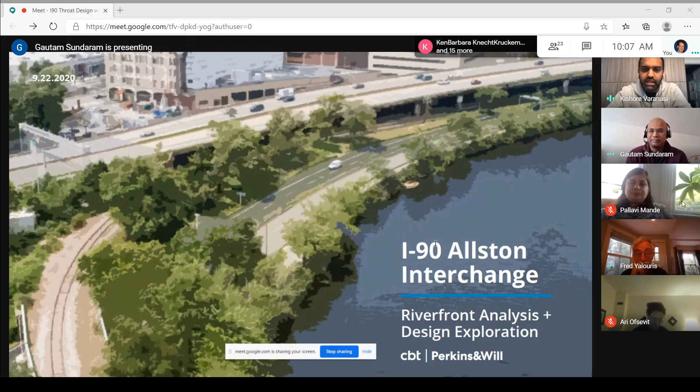I know that some of you have asked me to share this, and this has been cooking to the last minute, so if I haven't been able to share in advance, we can definitely share this presentation right after. A lot of the work has to do with the River's Edge related items, and we worked with Gautam on this, but I'll let him walk through the presentation and I'll chime in as we go along.

Thanks, Kishore. A lot of the work you see is really integrated with the work that Kishore, Devanshi, and the team have been leading. What we tried to do is really summarize all of this to make it a good synopsis of the overall work we've been doing for the last month or a little over that.

From a methodology standpoint, our process was: when we think about the River's Edge, we think about all of the transportation corridors currently being designed and all of the spatial parameters—we're looking at feet and inches for lane widths and shoulders. We felt that if we only focus on those transportation corridors, we won't be able to address or think about what it means from a riverfront standpoint.

To really address this from a riverfront standpoint, not just restoring it to what it is right now, we want this to be something progressive, but also thought of as part of these entire infrastructure systems themselves.

To evolve that thinking, we took a diligent process of first analyzing and understanding what existing natural systems are there, really looking at the infrastructure systems we have with all the outfalls and stormwater infrastructure, understanding what those challenges and conditions are, and then also looking forward to the impacts of climate change, especially flooding conditions and extreme heat, and understanding those impacts on the riverfront edge.

We looked not just at the throat as one section, but thought about the riverfront as a diverse condition all the way from River Street to the BU Bridge. Along with a series of precedents and examples around us, and what we learned from the analysis, we developed a toolkit of strategies.

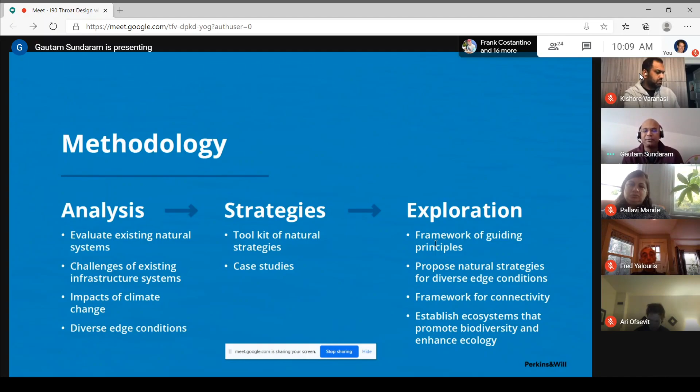We took those strategies and employed them back to think about this as a framework grounded by a series of guiding principles, setting this up with natural strategies, employing a lot of urban design and connectivity, and establishing this as new ecosystems that promote the ecological benefits we'd like to see, setting a strong attitude for what the riverfront vision should be.

Starting from analysis—and Kishore, feel free to chime in—we looked at the existing conditions: where we have the bridges, what we have from the existing right-of-way for the roadways, the existing location for pedestrian walkways currently shared by cyclists and pedestrians altogether, and a lot of those constrained conditions as well.

The PDW path—Gautam, go back. Sorry, the one thing we've been looking at, above and beyond just the throat and the rest of the system, is the BU Bridge Grand Junction nexus, and how we might link the Paul Dudley White path to the urban system that exists at multiple complicated levels.

You'll see some ideas. One is clearly the Paul Dudley White path as it passes underneath the BU Bridge—very constrained, very unsafe, with both pedestrians and bikes going around the abutment. There's right-of-way underneath, in the left image next to Soldiers Field Road, that requires some rearrangement of the Grand Junction Bridge to cut through, which is probably not shown here.

Can we just go straight essentially instead of doing that dog-leg movement underneath the bridge, while still preserving that for pedestrians? Can the bikes go straight through? And also, can we connect from BU Bridge, as you're coming from Cambridge and Grand Junction, in a meaningful way down to the river, including some unidentified paths? These are some of the places where we paid attention.

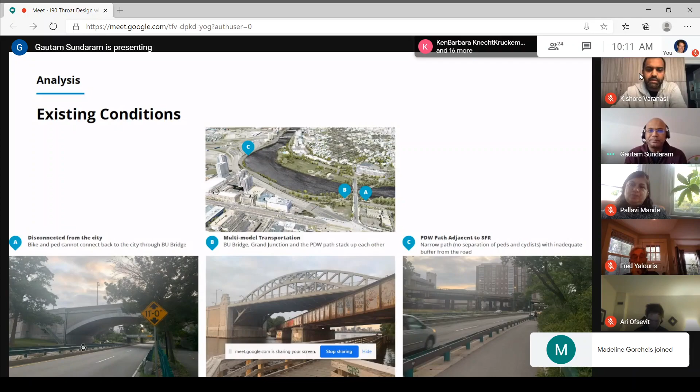So then starting to analyze, this is looking at a map. This is River Street over here, this is BU Bridge, as Kishore was just describing. What this lays out is the on-grade condition, which shows the realigned Soldiers Field Road, the realigned Interstate 90, and the Grand Junction and the train tracks associated with that.

What we've done is basically analyzed this condition against all of those criteria we were talking about earlier. For us, that began with understanding what the riverbed condition itself is. So this reflects the contours or topography at the riverbed condition that starts to highlight where do we have the steep slopes.

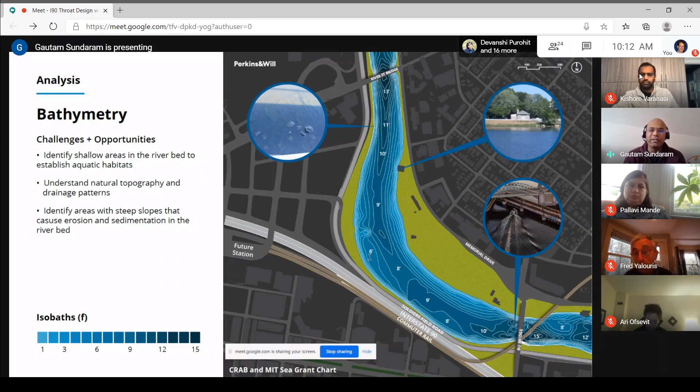Where do we have the shallow sections where we can start to create opportunities for introducing aquatic habitats, but also to look at the edge condition along with the land side, to think about where the erosion issues are, which is a very prevalent issue along the entire Charles River edge condition, where sediments and pollutants are being directly discharged into the river edge itself. So to look at opportunities where we can start to really make those a shallow section.

This graphic starts to now marry the riverbed topography with the landside topography. The reds are basically where it's highest, going down through to the greens. This helps us understand where we have those flat areas where we can start to make interventions of stormwater BMPs and other interventions that could help us deal with a lot of the stormwater issues, but also other ecological aspects.

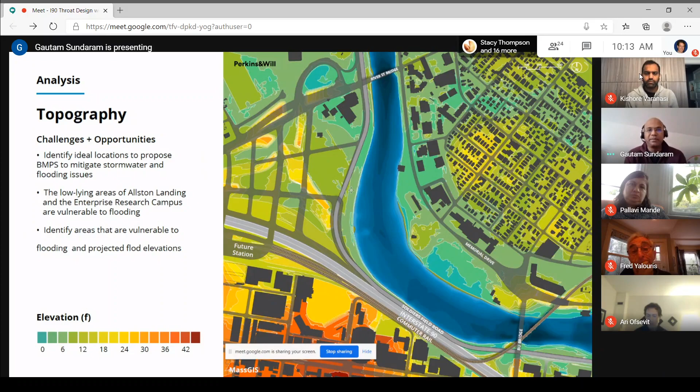Then looking at the infrastructure itself, this is something talked about a lot, especially with the Salt Creek infrastructure line, which basically drains a significant amount of watershed. MassDOT, I believe, has said that they're not touching that. What we wanted to do is highlight all of the existing infrastructure that is culminating to 3 CSOs that are directly outflowing into the riverbed, into the river corridor.

This is basically all the pollutants, the trash that is currently being discharged directly. You can see it graphically through these plumes. That's really bringing a lot of pollutants that have caused aquatic die-off. So that's one. The second is all of the road.

Yes, go ahead, Pallavi. Can I just quickly clarify? I know it was just mentioned in terms of CSOs, but those are not CSOs. The CSOs are just on the other side of the river, marked in green, because a lot of people have emailed me to confirm that. Those are systems that are just taking stormwater from a larger drainage area. Okay, so this is basically just the drainage, but these are still direct outfalls. Yes, you can see those. These are the images of what they are. There is no pre-treatment, no way of collecting it or pre-treating it before being discharged directly into the river. Absolutely, thank you, thanks for clarifying that.

In addition to that, we've located all of those drain connections that basically discharge all of the stormwater from the roadways directly into the river as well, which brings the salts, the oils, the sand, and other pollutants discharging into the river edge. This really starts to highlight we've got some serious infrastructure issues, and it would be a missed opportunity not to address this as part of reimagining the riverfront edge.

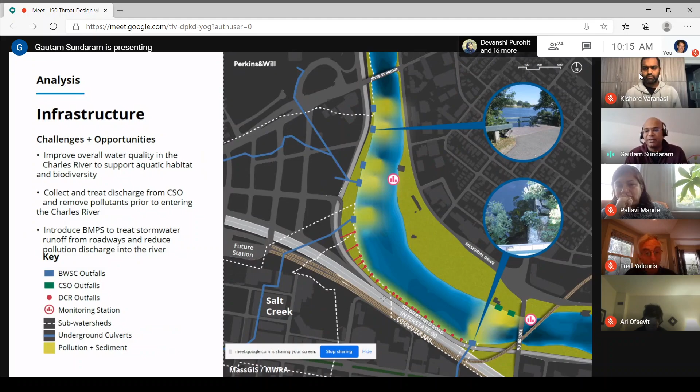And then along with that, to really look at the flooding conditions as well. While this is looking at elevations, what we tried to do is look at what the projected elevations would be for 2070 for a 100-year storm or a 1% storm, and to look at where those flooding conditions are. You can see that highlighted here. We've also started to map out where some landside drainage flooding conditions are, which would lead us to think about landside strategies. Pallavi, you've been trying to think about a very integrated approach which looks at strategies of managing water and collecting water before it's discharged towards the riverfront.

So I think coupled with both of these strategies, not only along the riverfront edge, but also on the land side, would definitely be immensely helpful. Looking at this from a resiliency standpoint, we need to think about how we incorporate areas for storage and also improve the flooding conditions of our infrastructure.

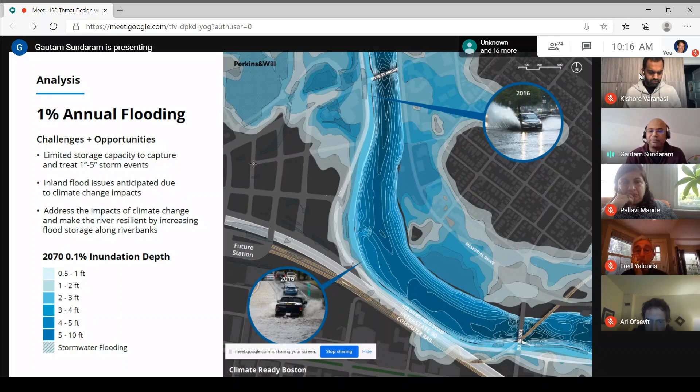Then looking at the ecology and habitat as well - currently the conditions along that edge are fairly harsh. There's a lot of pavement. There are trees, but significant portions of them are dead, or they're not providing adequate shade on the pedestrian walkways, which are constrained along them. The edge condition itself is very steep, and the plant materials have a lot of invasive species.

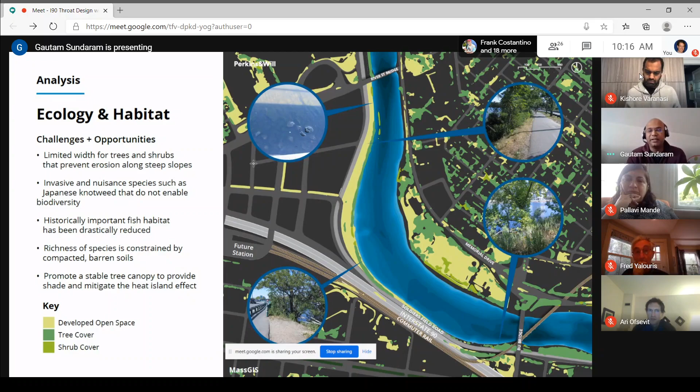Typically, what you'd want to see are plant materials that have a lot more biodiversity, but also help stabilize the slope as well. In order to do that, you have to have a really strategic way of thinking about the entire ecology and the edge condition, and also looking at how it helps the aquatic habitat side too.

And this directly relates to extreme heat. This is a map that looks at surface temperatures, and the reds are always the highest, close to 95 degrees. What we're trying to highlight is that when you don't have a buffer against the riverfront edge and it's all pavement up to it, the river's edge condition gets very hot.

And that relates to aquatic die-off. It also relates to how algae blooms are occurring, and I know there's been a lot of recent conversation about algae blooms along the Charles River. In contrast, when you look across on the Cambridge side, the difference is nearly 10 degrees when you have green space at the riverfront edge itself.

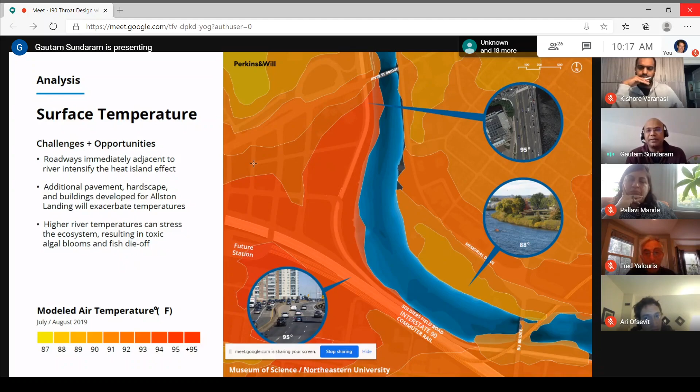So really thinking about how we create green space and create buffer will help us mitigate extreme heat and the effects of urban heat island.

And then finally, at the surface, looking at the edge condition dimensionally to see what constraints we have. The width from the edge of the curb ranges from 9 feet. Where we get to the green side, it gets to the highest, nearly 150 feet wide, but then it starts to get constrained back. And then we have nearly a 450 foot edge condition where we pretty much have no width.

So how do we incorporate the Paul Dudley White path? How do we incorporate a number of these ecological and landscape strategies along this entire edge to give us those greater benefits? This really helped us understand what those edge conditions are, not only spatially, but also physically - looking at where there is stone, or steep slopes, or things like that.

Excuse me, just one question - are these dimensions measured from the edge of the river to the proposed edge of that future grade condition?

Yes, that is correct. All of the analysis you see is based on the on-grade condition, every single one of them.

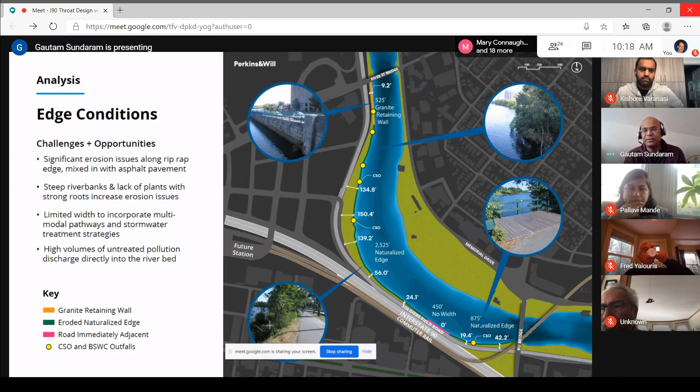And then looking at those edge conditions spatially as well - I'll go through this a little faster in the spirit of time. Rather than just focusing on the throat, we started from River Street. This is section A, highlighting the constraints along all of those edge conditions and where we have opportunities for incorporating bolder strategies.

With section A, where we're basically coming right off the Soldiers Field ramp, we only have about 9 feet of width left after the edge of the curb to the existing stone wall there. So how do we incorporate a multimodal path, and how do we even incorporate some kind of green buffer along there?

As we get closer towards sections B, C, and D, we start to see that we have a lot more dimension that allows us to create much more robust interventions - from wetlands and stormwater strategies, but also looking at opportunities for how we can pull back those outfall structures that are currently daylighting directly into the river. Can we cut them back like some of the other examples? We'll share those as well.

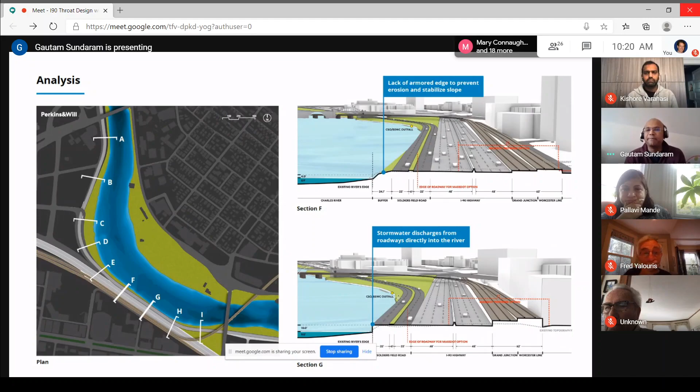As we get closer to what's been called the throat, you can see over here in section G we have a stretch of nearly 450 feet, plus or minus, where we have no available width between the edge of Soldiers Field Road and the existing shoreline. So we have some suggestions on how we can incorporate those.

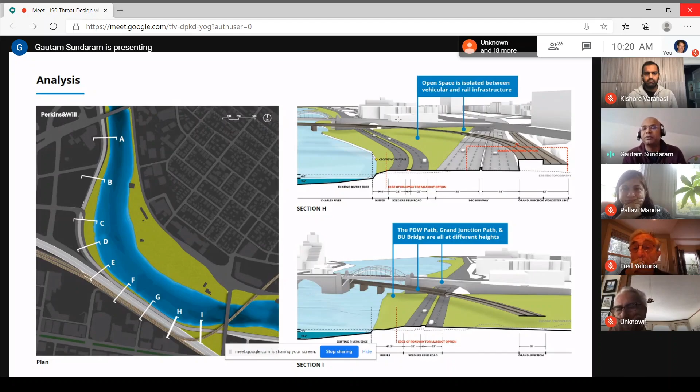As we get closer to the BU Bridge, the complexity increases, as Kishore was talking about, with the new rail connection with Soldiers Field Road, and how we use a landscape system or strategy that helps mitigate pedestrian connectivity all the way up to the BU Bridge, which currently doesn't exist.

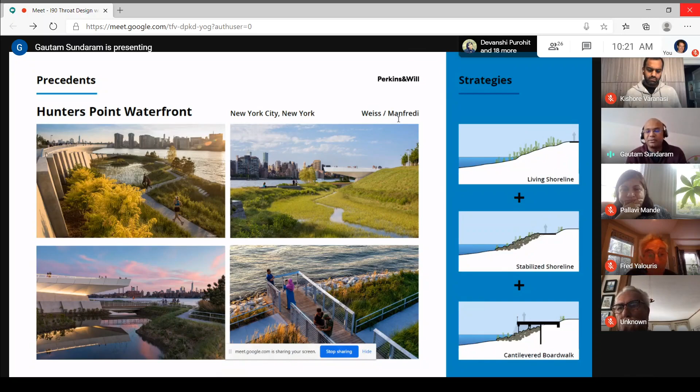So with that, we looked at some case studies of successful examples. This is Hunters Point Waterfront, where it was not only reimagined as infrastructure, but also as part of a park with academic value and also appreciation from a recreation standpoint, showing how these infrastructure systems can become a place of celebration. They dealt with a lot of similar issues, being right next to prominent vehicular corridors as well.

Very much within Boston, the Charlesgate by the Muddy River, where they're capping an existing outfall structure into pre-treatment wetlands. But that is also being celebrated as part of a passive and recreation system with dog parks, open space, and other environmental values and benefits.

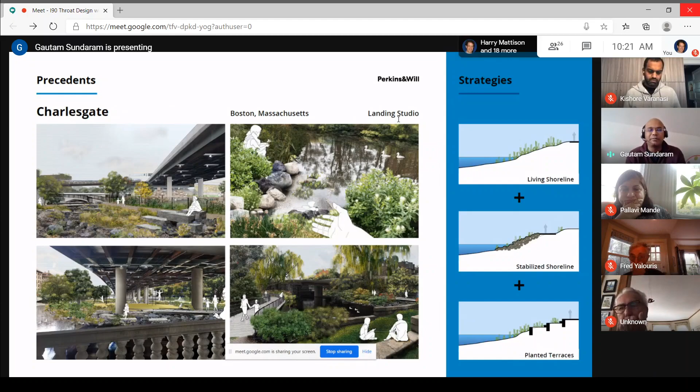Within those projects, there are also great strategies for how water from the roadways is collected into quality structures before being daylit into the natural river condition or the edge condition itself.

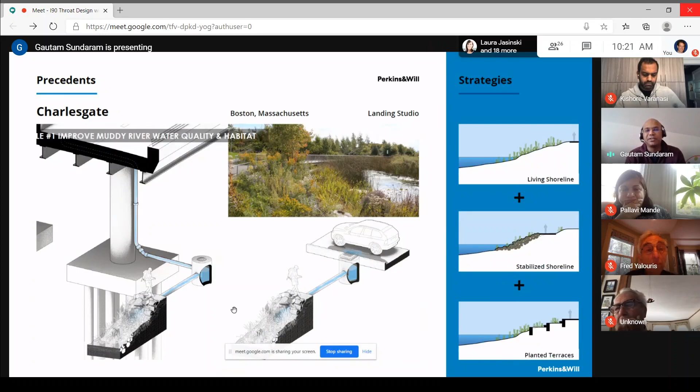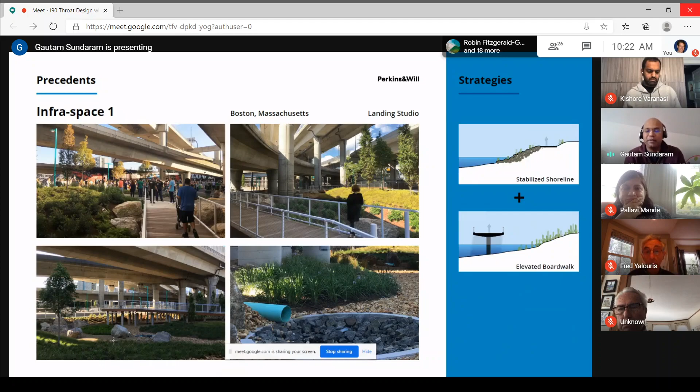Thinking about infrastructure as well, how can we collect a lot of the stormwater runoff and create pre-treatment? This is right here in Boston by Ink Block. It's very successful infrastructure, done in a contemporary way, but also becomes very programmable and park-like, adding more value as a park system too.

And just some other examples about how living shorelines have been accomplished, and how multimodal circulation systems have been incorporated as part of that.

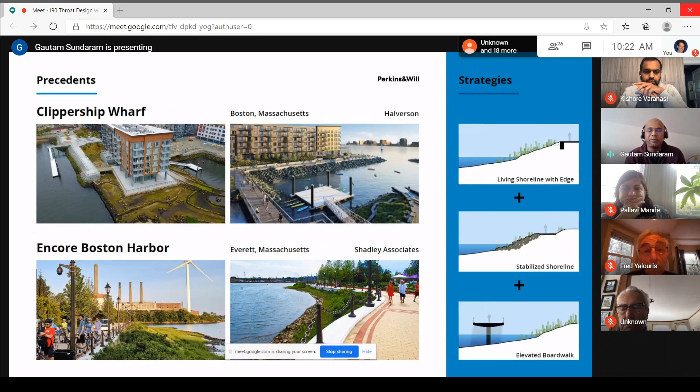So really drawing upon all of these precedents and what we learned from the analysis, we established a toolkit of two categories of strategies. One is basically naturalized edge conditions, about how we can make that a living shoreline.

How do we incorporate a lot of the circulation systems as part of it? And how do we also start to create opportunities for aquatic habitat benches and other ways to really bring back that river life and softness along that entire edge.

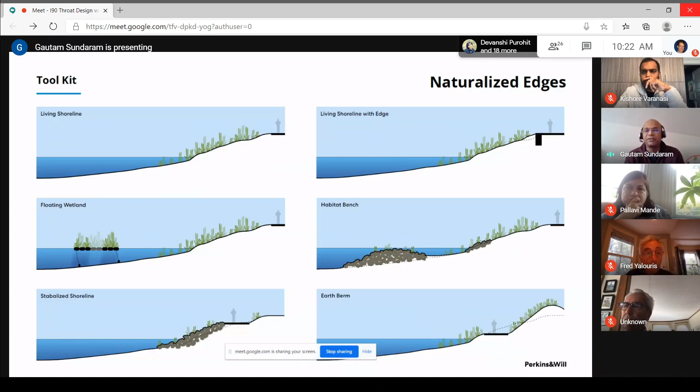Similarly, when we're up against infrastructure or built environments, how do we continue to have those kinds of benefits in how we think about edge conditions? Whether coming up right against a riverfront, how do we armor the slope or create opportunities for stepping down that allow engagement with the riverfront, or have boardwalks in minimal locations that don't impede so much on the shadows and the aquatic life, but still help create some of the circulation paths.

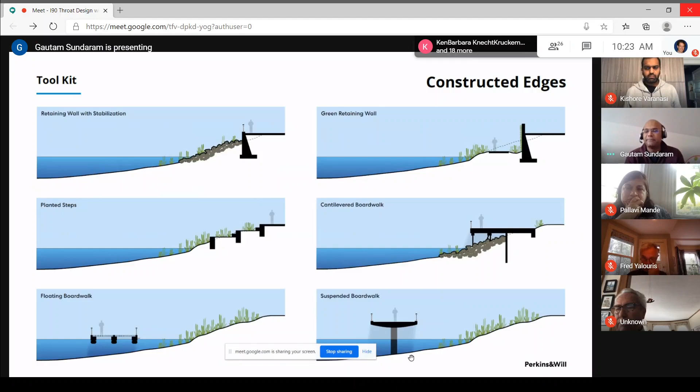So we said, okay, let's take these strategies and look back at those sections and ask how we address each of the conditions we were looking at. So starting with section A.

Looking at that 9-foot dimension we currently have, can we incorporate a well-planted verge that helps create that buffer, but also has enough dimension to help it survive?

Also for longevity, we reviewed a lot of these strategies with Pallavi and team, and we also had folks from the BSA and BSLA giving us input on this, along with Weston and Sampson. So we incorporated a lot of their suggestions on what we felt were appropriate strategies and to get the accurate dimensions as well.

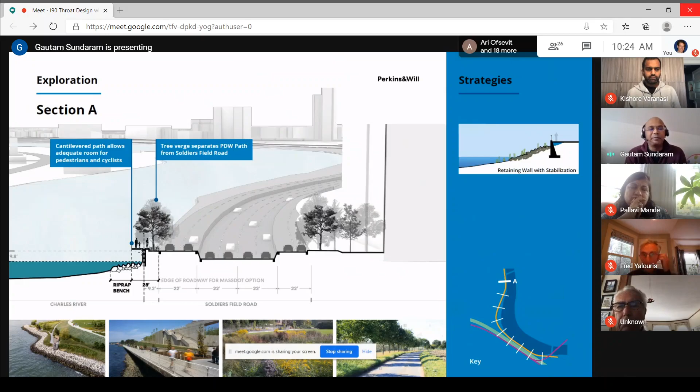And then looking at a multimodal shared path of bike lane and pedestrian walkway nearly 28 feet wide, it'll have to be cantilevered above and past the wall itself to incorporate that.

And then as we get closer, where we have a little more dimension with the green spaces, we can incorporate areas for pre-treatment and wetlands, where those not only serve as stormwater infrastructure, but also become spaces you can actually engage with and walk through as part of this larger park.

This is the existing shoreline, just for reference. What we're suggesting is to take what's currently a very steep slope and make it a much more gradual slope, establishing a softer, living shoreline along that entire edge condition.

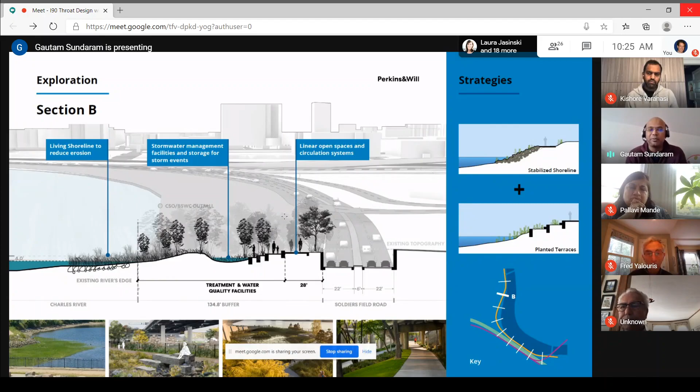You start to see this as a combination of open spaces, wide walkways and promenades that separate bike lanes and pedestrian walkways. In some locations where outfall structures were previously located right at the edge, can we cut them and cap them, and really daylight that water into wetlands where we can collect the water, treat it, clean out the trash, and create storage opportunities before it's led into the river corridor.

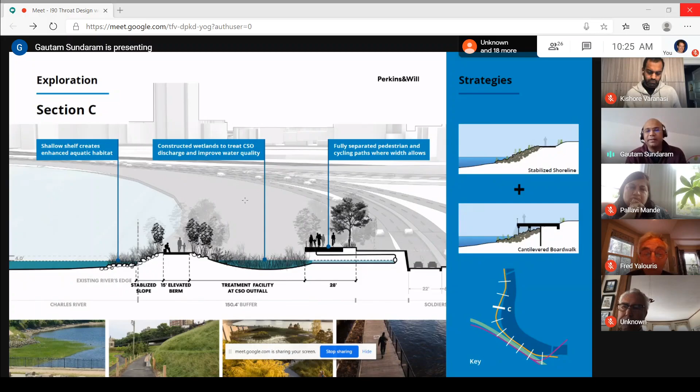These also become opportunities for creating overlooks where you can appreciate views not only across the river, but also during events.

As we get closer to opportunities for connectivity across, for example, the Agganis Way, we think not just about accessibility, but about introducing berms as a natural barrier between the roadways, also on the Cambridge side. These could be ADA accessible at a slope under 5% as they ramp up to locations where we can connect across to Agganis Way.

These also become places where you can separate the bikes and pedestrians, creating very unique and diverse conditions that make this a bucolic and active landscape.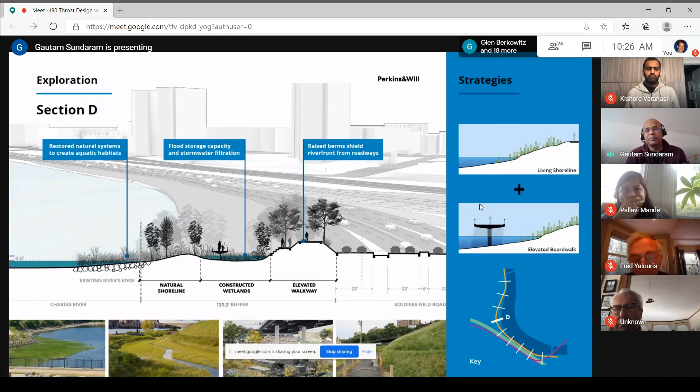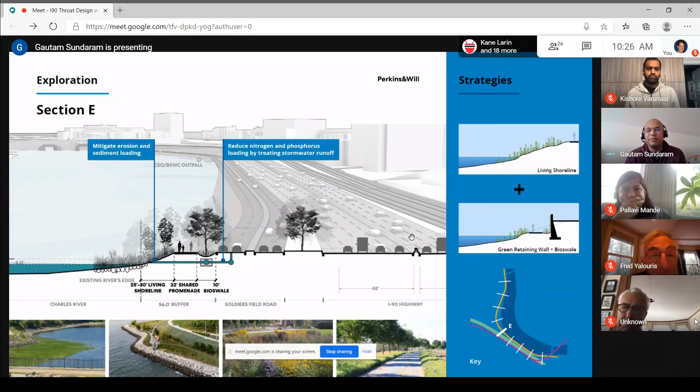As we get closer to the throat condition, we think about how to collect all of the stormwater runoff, now with the Pike and Soldiers Field Road on the same elevation. Is there a strategy for collecting all the water and passing it through some treatment process?

Water quality structures here, and once the sediments and pollutants are taken out of it, that's when it gets discharged along the edge, like some of the examples shown earlier.

These kinds of piers and boardwalks can be built without really affecting the aquatic habitat below.

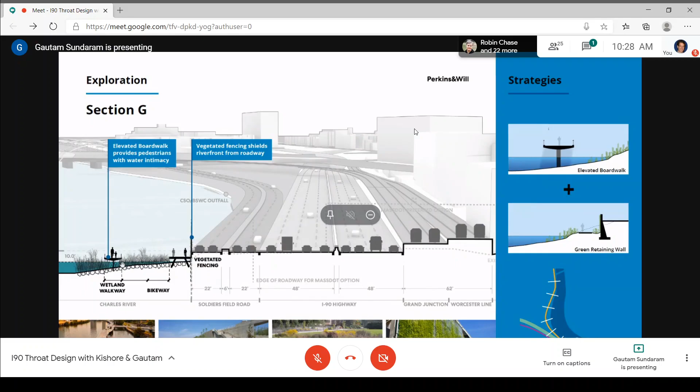When we have the most constrained condition, we look at opportunities where the bike lane sits right against Soldiers Field Road with some kind of visual and noise screen. Then pedestrians have a boardwalk that's much more part of the river corridor, and in some places it comes back closer next to the bike lane, like this example, to create diverse conditions.

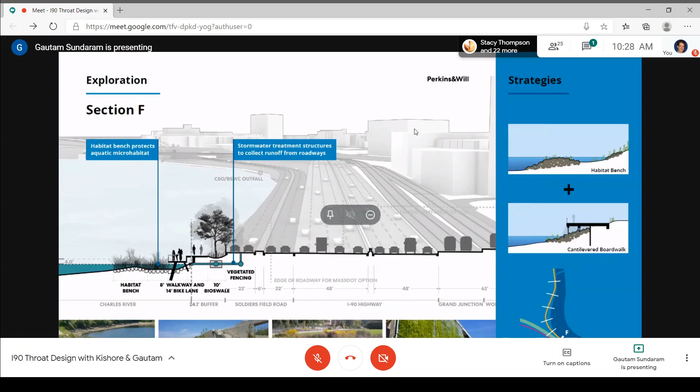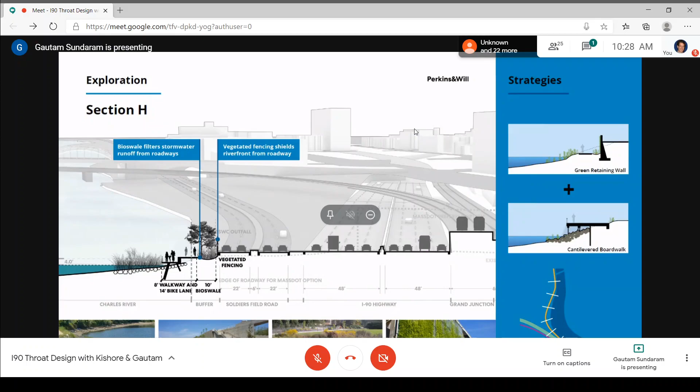As we get closer back to the BU Bridge, the bike and pedestrian paths come back together. We can incorporate a bioswale here again to collect a lot of the water. And as we approach the BU Bridge, we think about incorporating natural berms that, at an ADA accessible path, let us connect up to the BU Bridge. We have some visuals as well to show that.

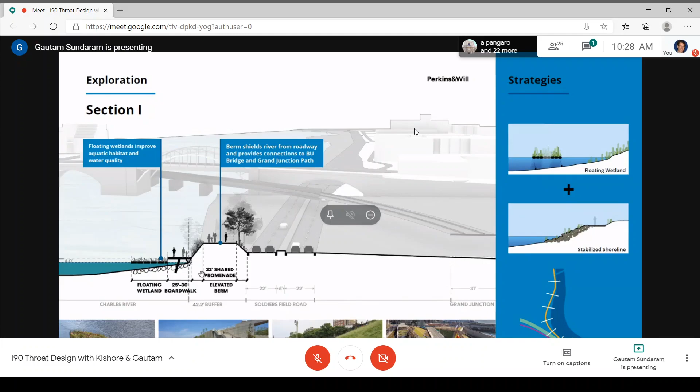So, looking at those as a series of landscape strategies—Kishore, maybe you want to speak about how we've approached this as an overall framework of connectivity as well.

Yeah, I think this is pretty well covered so far. Again, it's about connections—BU Bridge connections, and also potentially looking at the connection along the Allston neighborhood, behind the neighborhood between the tracks to Cambridge Street.

So we're looking at all of those connections and how they can be resolved through creative grading, and also turning them into elegant solutions, which you'll see in a moment.

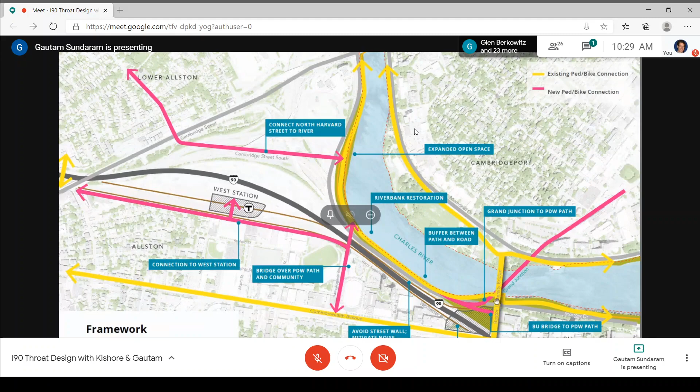So this is a view of the existing conditions right now. I don't think it needs any more description. But the idea was how do you visualize this framework of different types of strategies into what really sets up not only a new functioning, living landscape along the entire edge of the riverfront, but also starts to make those kinds of connectivity into the neighborhood.

So here you can see a potential connection to the Agganis Way, connection to the Allston neighborhood towards Cambridge Street, and this is also looking at the BU Bridge as well. We'll have enlargements of all of these to show the different examples.

The idea really was, if you have the main circulation spine of a promenade, bikeways and pedestrian ways along the edge, you also have opportunities to create wetlands and interventions with oxbows that allow water to come in. Not only do they provide recreation path systems, but also incorporate stormwater strategies, wetlands, and resiliency management as part of those strategies, completely softening that entire edge condition.

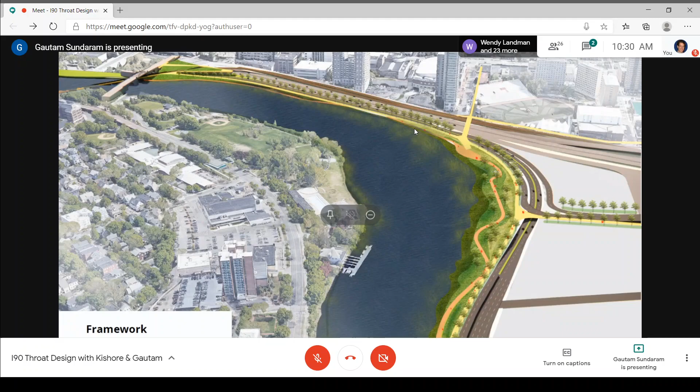So with that, we'll zoom into some of these enlargements, and Kishore, maybe we can walk this through together. Here the idea was if you had that wide promenade along Soldiers Field Road.

And if you had a boardwalk along the edge as well, that boardwalk could continue to meet with the existing path below the BU Bridge, but also we could have an ADA accessible path that really allows us to make those circulation systems.

You can follow my cursor all the way up to the BU Bridge, but also think about ways of incorporating new spaces where you could imagine this to be a great new overlook, a way of appreciating and looking down for events, or being part of how we engage with the river through a series of these moments.

And then with pedestrian connections on both sides of the Grand Junction. Yeah, I think it could work with either side. I know there may be options in terms of how the Grand Junction pedestrian trail may come out. If you're on the upstream it'll work differently versus the downstream, but both can be connected, and it'll work as part of the BU Bridge connection system as well.

You can go both towards the Paul Dudley White path, but also go up to the city at the upper level to the BU Bridge. Exactly, and you also see the Paul Dudley White path splitting right under Grand Junction. One stretch goes directly under the arch of the BU Bridge straight in, the other maintains the existing connection, which is somewhat narrow, but both are shown in this case.

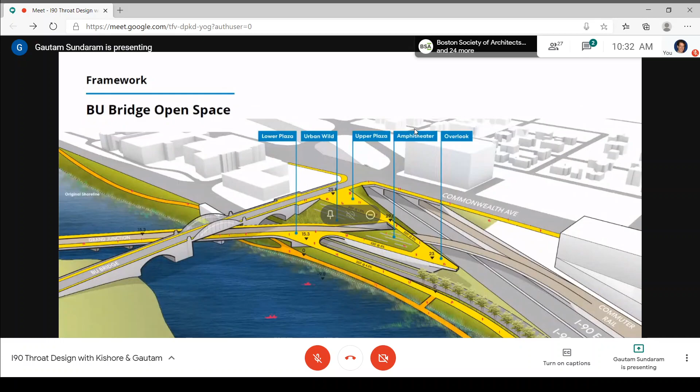So that was the base option. And this is a view you've seen before of what that boardwalk could be with the bike lane and the pedestrians.

The second was, are there opportunities where we can further enhance? We've talked about other ways to, in our lifetime, hopefully see the Charles River be swimmable.

If we can incorporate programming opportunities to really engage with the water, other ways we could peel away with the boardwalk and create platforms. We see many examples all over Europe, but other ways we can incorporate this to program the river, making these unique areas become celebrated moments and popular destinations.

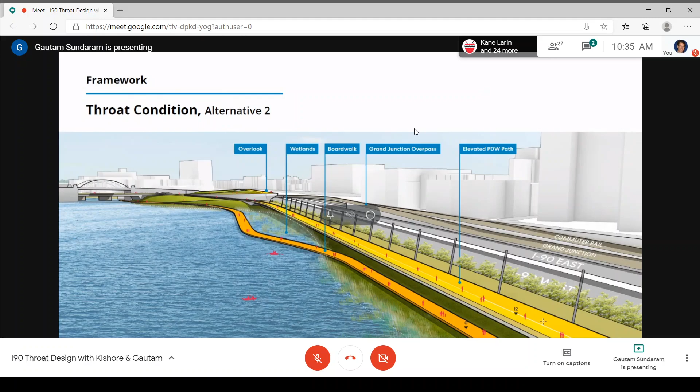And then lastly, coming out to the Agganis Way connection: the idea is you have the Agganis Way sidewalk, and is there an option where you could just come right off the sidewalk onto a bridge connection that would lead us to what could be a new plaza or a new great moment at the end of it.

We were looking at this in plan and analyzing it from the view standpoint, and you get these amazing views from this point looking up towards the Regatta and other events. So it'd be a great opportunity to come off of this to this overlook that gives you these great views.

But then it also becomes a way, because you'll be elevated, to use the advantage of that berm as a way of stepping down. These could become informal amphitheaters with some kind of platform that overlooks the river, making a very special place that anchors the bridge from the Agganis Way and strengthens those connections across.

So whether you're connecting at the BU Bridge, the Agganis Way, or even towards Allston Landing, the goal is to really celebrate those corners.

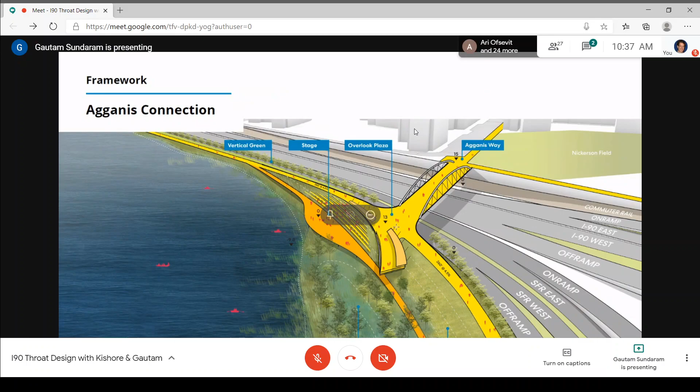Kishore, do you want to walk us through this? Yeah, keep going, it's okay.

It's fine. So this is basically the same view, now I'm looking at it from the Agganis Way. This is the existing condition, but what the team has done is really model what the MassDOT option is.

You can see the cage of the bridge below I-90 that would connect you across, and what kind of cage condition that would be. You see the crosswalks across, so can we reimagine this to be a robust multimodal circulation system with bike lanes and pedestrian walkways?

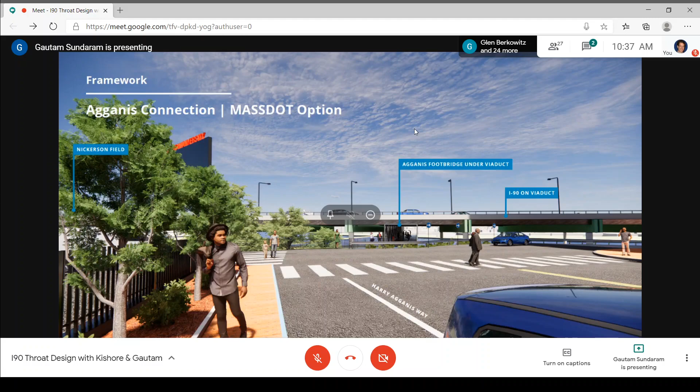What it also does is, you see that bridge across and you're above all of the traffic and roadways, adding another great moment of engagement. So now you're connecting to the river, and that's what's leading you and drawing you in, along with the views towards Cambridge as well.

So I think that's the last of our slides. Sorry this went on long. We can go back to any image you'd like if the team has any questions.

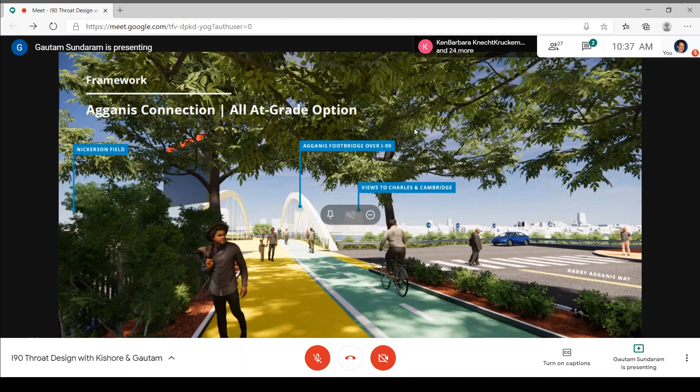This is great, Gautam. I saw most of the slides from the perspective of the landscape restoration strategies, but seeing how they overlay with the circulation makes it helpful to understand exactly how the two fit together.

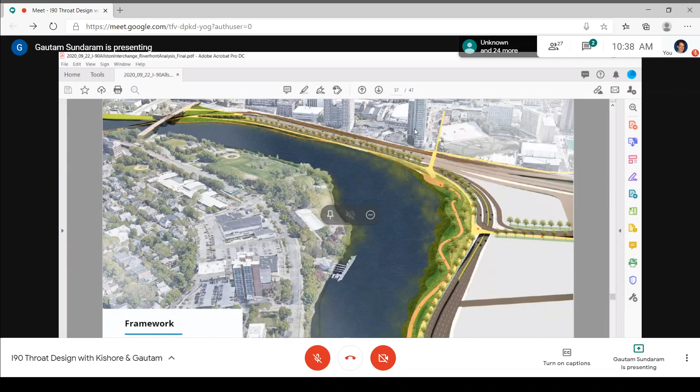Two comments I wanted to offer. One, you're only looking at the all-at-grade option, which is something we're all trying to improve based on what DOT has put out. We've clearly stated formally and informally that we are not supporting that. But I think what you've come up with in terms of ways of potentially mitigating any intrusion into the river could definitely help make the case for river restoration.

The second piece, from the perspective of DCR's appetite for looking at these strategies, we know they've been a bit resistant in terms of looking at stormwater management as a way of informing river restoration. A lot of the work Weston Sampson has done is trying to push them in that direction. I can't say they are there yet, but the case study examples and precedents you referenced from Charlesgate give some indication that they might get there sooner than later.

So I really appreciate you using that precedent to inform what's going to happen with I-90. The third piece I wanted to put out is the tolerance for intrusion into the river. I understand, and I'm not totally certain, that there might be some room on the other side where BU owns some property. I know there are buildings right up against the rail infrastructure, but we're also hoping DOT will take a good hard look at how the entire cross-section of transportation infrastructure might be moved in tandem.

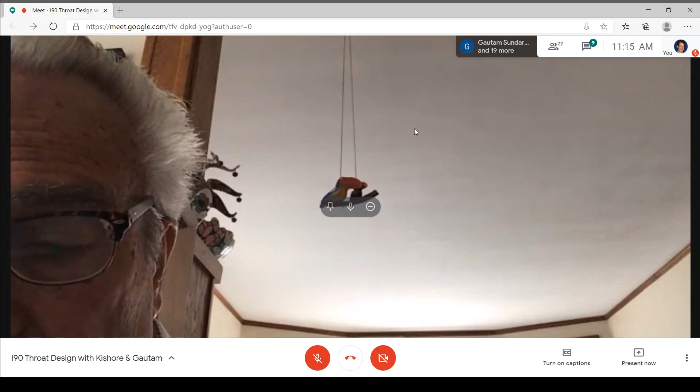One of the great things about these graphics and the process Kishore and Gautam have gone through is they're not doing one cross section in the middle of the throat—they're looking at everything from River Street to the BU Bridge. And what's clear is, even if you don't like the 400 to 800 feet of throat, depending on how the transitions work, you're getting a dramatically improved river. If the price you pay is a boardwalk in the river carrying both bikes and pedestrians for 800 feet to get everything else, that's a realistic choice that can be made.

Arguing the river should be fixed because God should give money to environmental agencies instead of the federal government giving it to transportation agencies is a religious discussion, not a practical one. Given the laws we have and the attitudes at Federal Highway and MassDOT, it'll take pushing, but it is feasible to use transportation dollars to fix the entire river edge.

Some people might like the boardwalk for the 400 or 800 feet, whichever it turns out to be; some might not like that 800 feet. But the real choice is between a much better river all the way, or all the way but for that 800 feet. You can get that with the all-at-grade. You absolutely can't get it with the highway viaduct, and I'm very dubious you can get it with the hybrid.

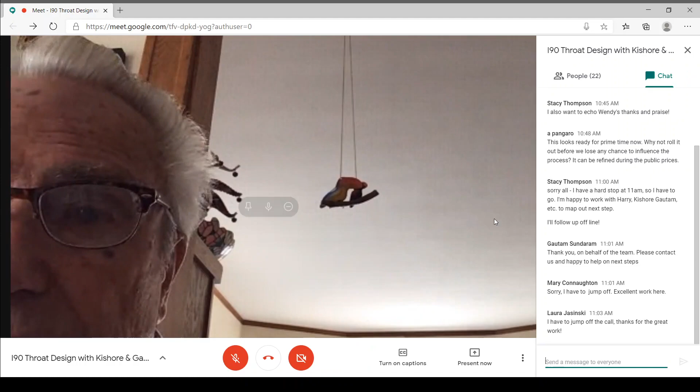One of the most valuable things about the hybrid being in the environmental analysis is that the secretary supported it and hasn't said she doesn't anymore. If they put honest construction costs on it, it'll by far be the most expensive option. So it would put you in a position of saying, let's do the all-at-grade and really do the river edge right, and it'll still cost less than the hybrid would have—so let's do that. There's some value in carrying the hybrid in the environmental process, even though I'm totally dubious it's a viable option.

But there's no value in the highway viaduct being carried, and the sooner we could kill that, the better. It was dead, and it should not have been brought back to life.

So, at the risk of for once agreeing with Fred, I don't think CRWA is the only party who's even ready to look at the highway viaduct. And I agree with you—I think it's a hugely missed opportunity if that option ever gets selected. So I think you're right, we have to keep the hybrid alive and trust DOT's technical skills to make it as viable as possible.

But I also want to say you're absolutely right that God is not in a position to give the money to DCR or DEP. I was also suggesting we look at the mitigation conversation around how this transportation money can be put towards river restoration without necessarily getting caught up in whether DOT has the technical ability to do it right. So I'm agreeing with you, Fred, that the money coming through transportation has to be directed to DCR and DEP so this can be permitted, but also so DCR will have the political will and leadership to direct it towards river restoration in a way we'd all like to see.